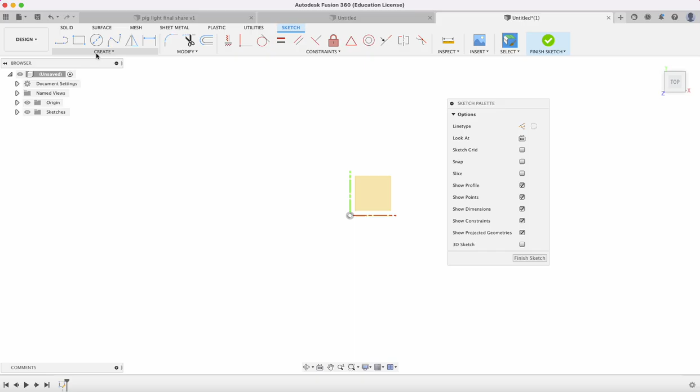We first want to see our origin. We want to make this thing the right size, right? So we're going to create a sketch. Now we can use center point rectangle. We'll go over the datum point, which is 0, 0. And you said it was 40 by 30. And that's the overall toy's shape.

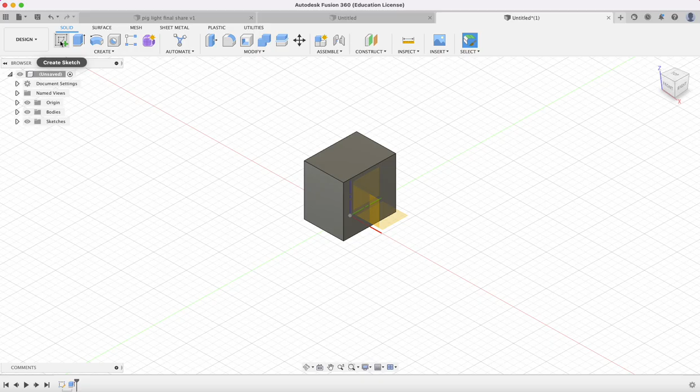We finish the sketch, and then we extrude this to 40. And now we have our overall object. The next thing we're going to want to do is create a sketch that envelops this object, so it could be some kind of closure. I'm going to make it circular because I think it's just a bit easier. And the way I'm going to do that is through the revolve command.

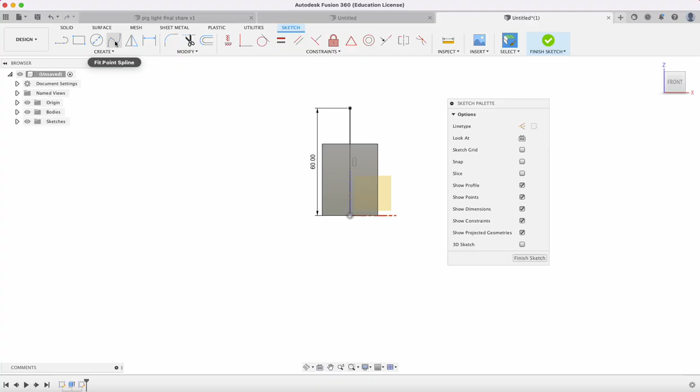So again, I go to the 0, 0. That's why I started with that point. And I'm going to go up a little bit past here by, let's say 60, just in case I ever make a toy that's larger. I'll make some kind of shape. It doesn't have to be an egg shape. I'm going to make this thing 40, again, so it can rattle around in there just like the Kinder Egg.

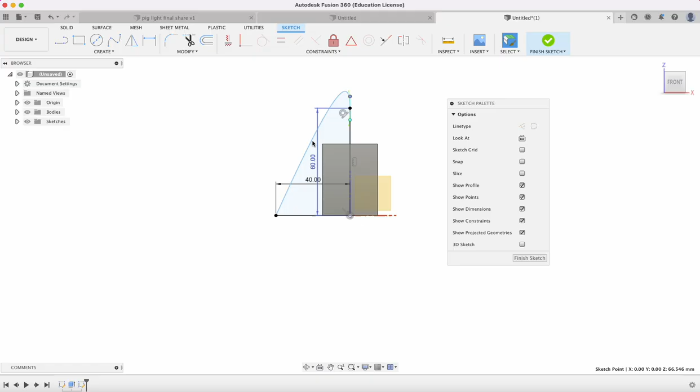And I'll make a spline line because I want it to be a decent enough shape. Okay. So I have my spline line. It's not perfect because it is kind of too angular. It's going to hit that edge if I ever make a larger object, and I can't drag it out. So delete that one, and I'll make another spline that has more than one point.

So I'm going to come over here, and over there. And what this allows me to do is actually manipulate these points. So I can drag them, I can change the shape at will, and it doesn't have to be locked into place. So I'll make this as my object, and I'll say finish sketch.

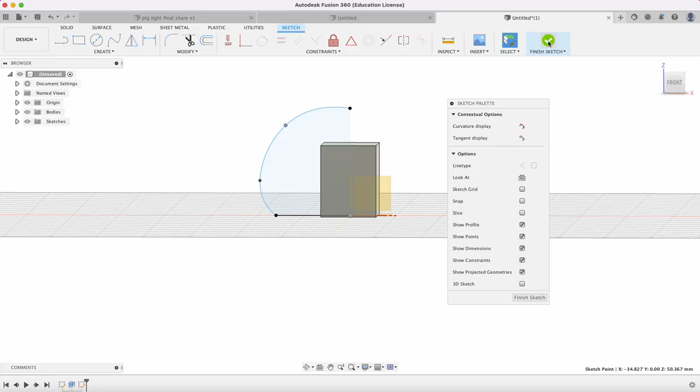Now I'm going to use the revolve command, and I'm going to go back in and edit my sketch as well. So I want to use this center line as my axis, and then over here I'm going to use this as my profile. When I do that, it thinks I want to cut because I have that other object, but I'm going to say it's a new body.

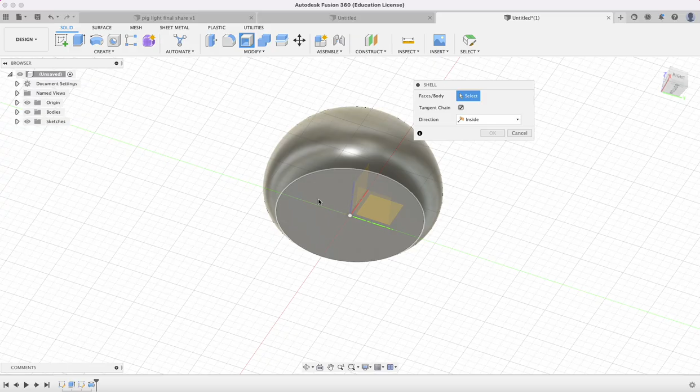There are two ways that I can shell this. So I can come into this flat bottom and I can say you're shelled and I want you to be 2 millimeters thick, and all of a sudden I have this shelled object, and I can click OK. And I can see the other body inside of there. Maybe not. But either way, let's see what happens. It goes away. This comes together. I don't know why that went away.

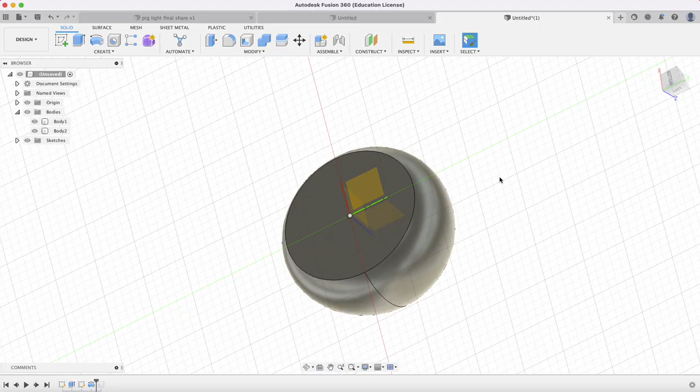Let's go back. So I have my revolve. I'm going to edit this command because I bet you that it joined or did something. No, it didn't. It shouldn't have hidden that body. It's weird. Because when I go back in time, this extrude, let's see this feature. Yeah, it's definitely there. It's definitely a new body. Huh, that's weird. So we're kind of just sanity checking ourselves here. There it is. Don't know why it disappeared. There it is. Okay.

The next thing is I need this thing to close. So this would be an opportunity to think of new ways. Hint, hint, foil, something, a reveal, any of those objects that we saw, toy box or Choco Treasure or whatever. This would be a line for demarcation example.

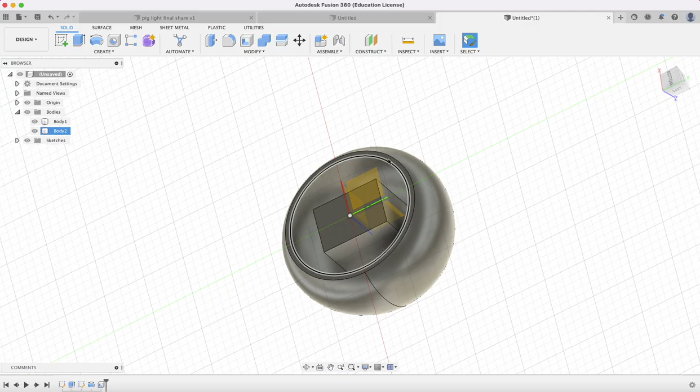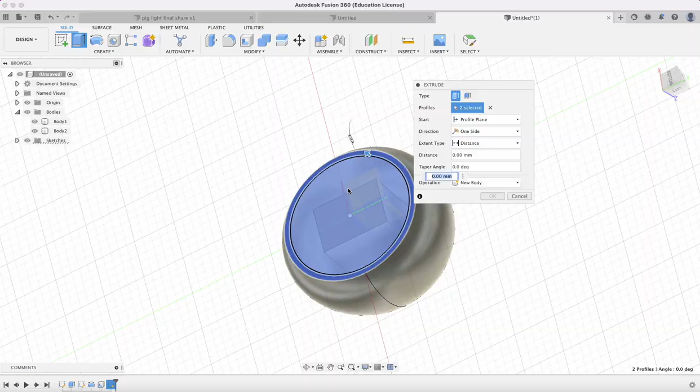Now in here, I'm just going to make this really simple, and I'm going to make a sketch on the surface, and I'm going to select the edge. I can make a circle or whatever shape because I know that it came from the center line, and I'm just going to drag it out there, and I'm going to make it equal to this edge right here. And that's going to allow me to finish the sketch and then extrude that piece and this piece so that I have some kind of lid.

I'm not going to join it. I'm just going to say it's a new body. I'm going to click OK. So now I have this little mushroom shaped thing. I can even create some kind of pressure fitting in there, or I can make it so this thing is tightened around it. And I can go back in and also draw the egg shape to surround this. So that's pretty much all you're going to need in order to